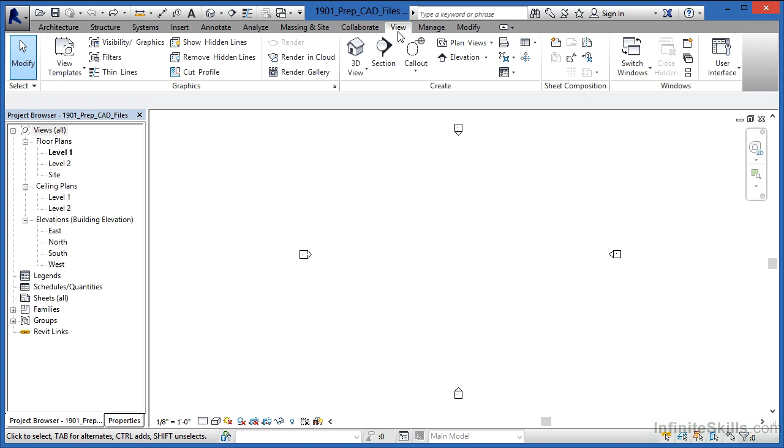Now to accomplish this, you need to begin by creating that drafting view. Because it's a drafting view, we'll find that under the View tab on the ribbon by selecting Drafting View. It'll ask for the name of that drafting view, and that'll be the name it shows up under in the project browser over on the left-hand side. In this case, I'm going to call it a garage detail. It's not the most descriptive name for it, but it is accurate. It is a detail of part of the garage.

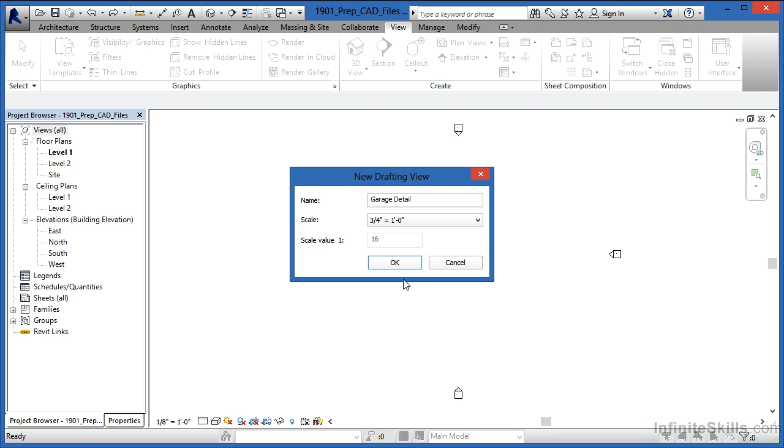Next, we have the scale, and I know that this is 3/4 of an inch equals a foot. And click OK. It's now created a new Drafting Views category under the project browser, and if you expand it out by clicking on the little plus sign, you can see that this is a garage detail. And it's now 3/4 of an inch equals a foot, and it's just a blank drawing area right now.

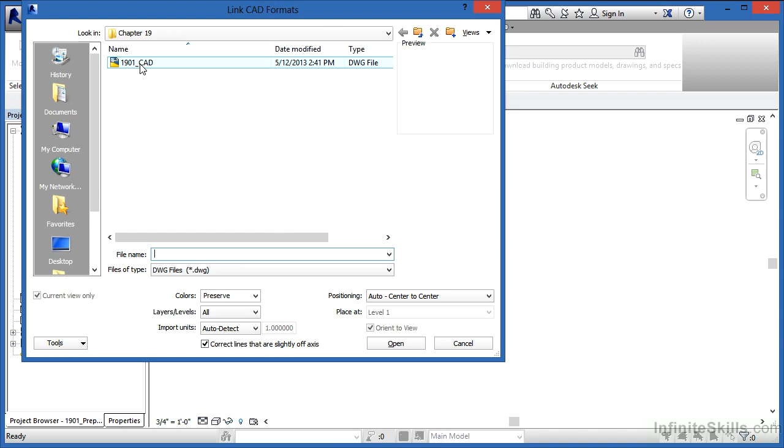To insert that CAD information, we come to the Insert tab, and we have one of two different ways we can bring that CAD information in. We can either link it in, or we can import it in. If you link it in, and I'll do this as an example, you'll then have the ability to select that CAD detail that you want to bring in. In this case, it's named 1901 CAD. From here, click on Open. Give it a few seconds to process.

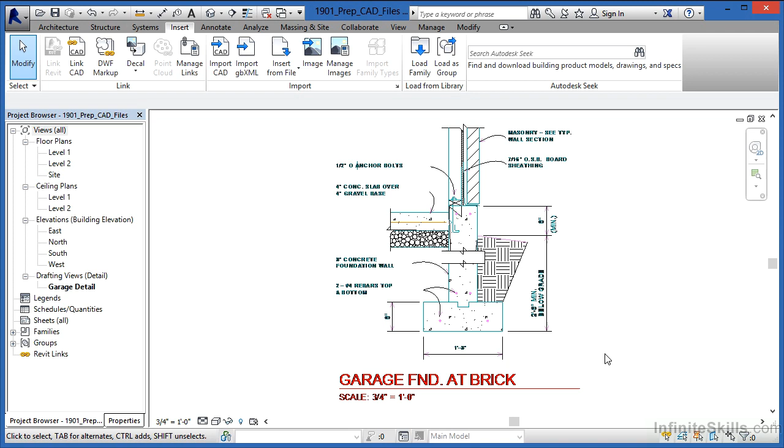The next thing to do will be to either type in the letters Z, E, or double-click really quick with the wheel on your mouse, and that will zoom extents so you can see that entire detail. If this is good enough, at this point you can place it in your drawing and start to print it. More than likely, you want to do some cleanup of this, and the reasoning is that this isn't really your typical Revit font. Most likely, your Revit arrows probably don't look like this. If you zoom in, you'll start to see some oddities like this little arc stops right here instead of coming all the way over.

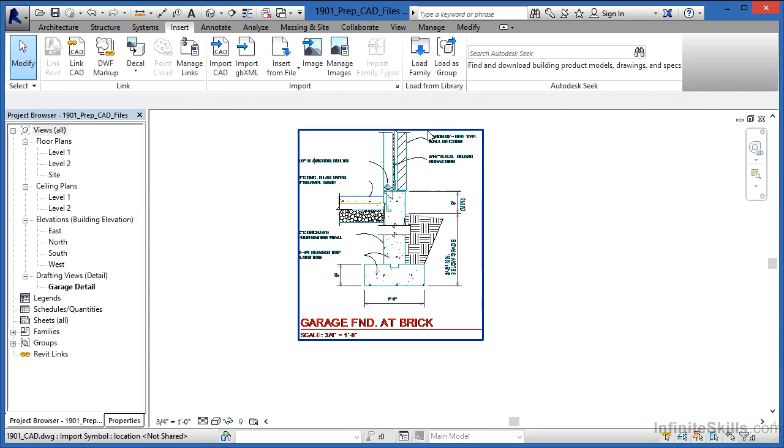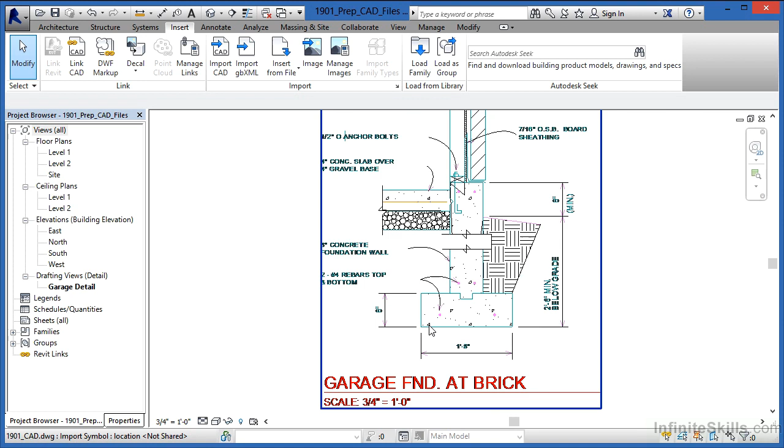So there's going to be a lot of cleanup that needs to happen in here, and really, if it's a linked file, it's difficult to clean it up inside of this environment. What you can do, though, is trace over a linked file, and you can use your drawing tools to draw lines by picking the endpoint of a line to the next endpoint of the line, and just start to sketch right over the top of it. Then whenever you're done, you can highlight it and press the Delete key on your keyboard, or just right-click and go to Delete in order to remove that detail. At that point, because you traced over the top of it and put in your text, you'll have an exact copy of that detail just redrawn inside of Revit.

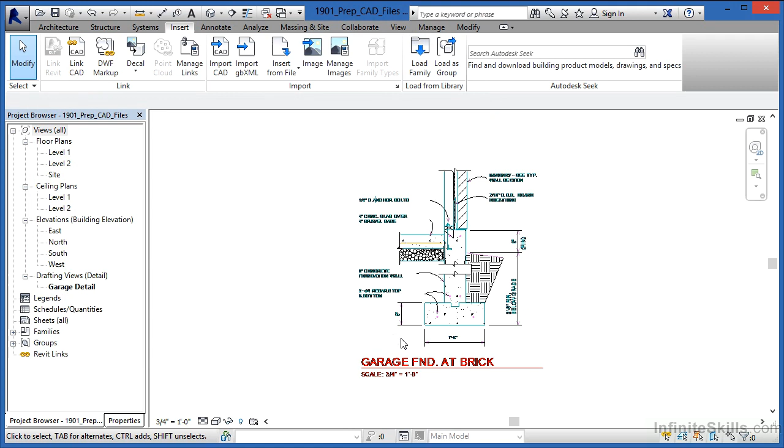The nice thing about doing that with the link is that you know that you get all the lines exactly right. You don't have to do much measuring. It's just click, click, click, and fill in the information without having to be amazingly accurate because the accuracy is already drawn for you inside of the original CAD detail. Now, the other thing that you could do instead of linking it in and then being forced to just trace over the top of it is you can import the CAD information in. If you do this, you can select that CAD file just like we did before, and click on Open. In this case, we didn't have to zoom out because we already were zoomed out.

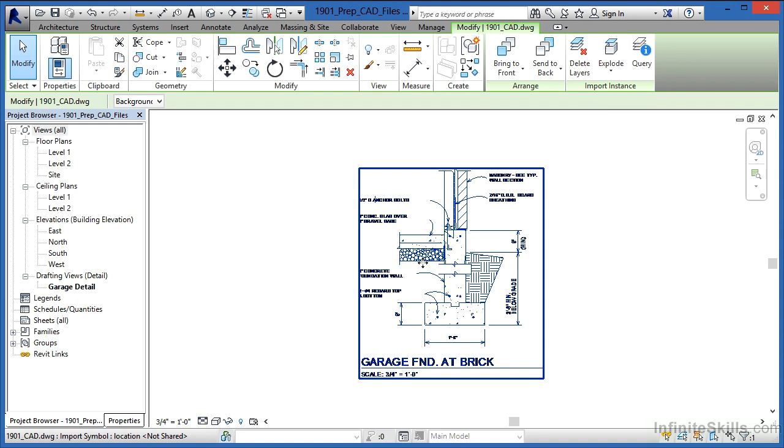If I select it, it looks exactly the same as it did before, but we now have something special, and that's called Explode. If you select where the word Explode is, there are two different options. One is Full Explode, and then there's Partial Explode. The Full Explode will explode everything. And when I say everything, that includes each and every line that makes up these circles in the gravel. It will explode these patterns here, so each of these little tiny lines that make up the concrete symbol would be individual lines. In short, it'd be a big mess inside of this detail.

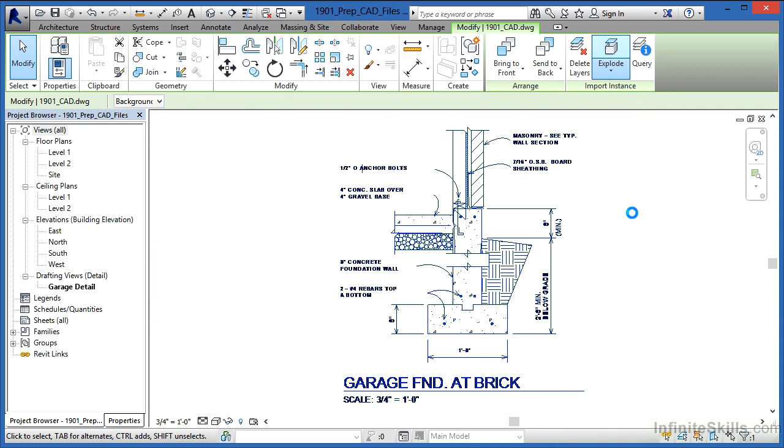On the other hand, the other option is a partial explode. You'll get a warning message, and you can close that warning message down. What the warning message said is that this originally came from a drawing that had three-dimensional information in it, and you can't bring that three-dimensional information into a drafting view. Are you okay with that? And by clicking OK, it just got rid of that three-dimensional information.

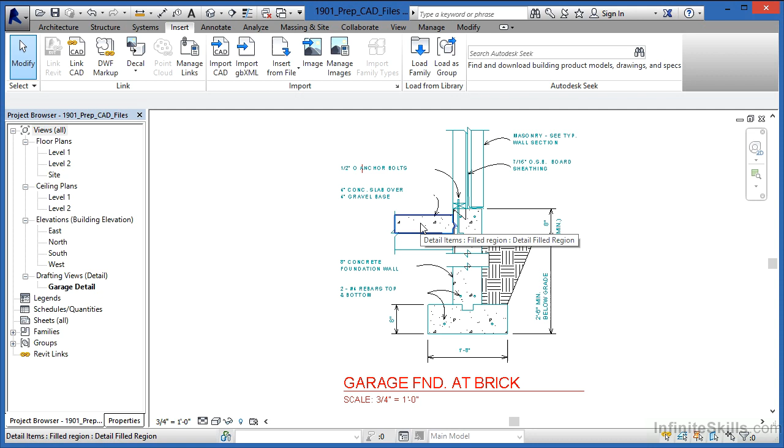Here, we can see that if we highlight over any of these pieces, things like the title can be highlighted, the dimensions can be highlighted, and I'll call it a hatch pattern because that's what it originally was in AutoCAD, but it's now a fill pattern in Revit. It's all one piece. It's not individual pieces of concrete, for instance. There is a problem, though. Let's take a look at this arc.

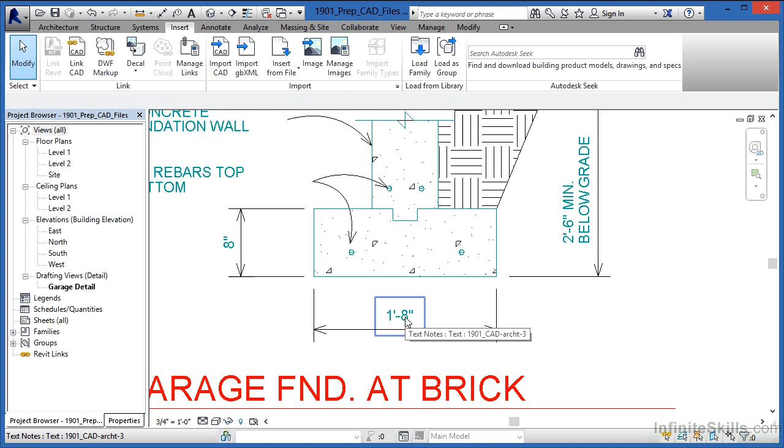Each individual lines and not a true arc. This arrowhead is no longer an arrowhead. It's line work that looks like an arrowhead. Your dimensions are the same way. Your leaders. Everything that might be part of a dimension that was brought in from that AutoCAD environment is now an individual line. Even the text, which would have been multi-line text, may be showing up as being just a

single line text. Now, one thing that you can do is select on any of these pieces of text, come in here to your Properties dialog, and then change it on the Type Selector list to be an appropriate size font, such as 3/32. And you could do this throughout.

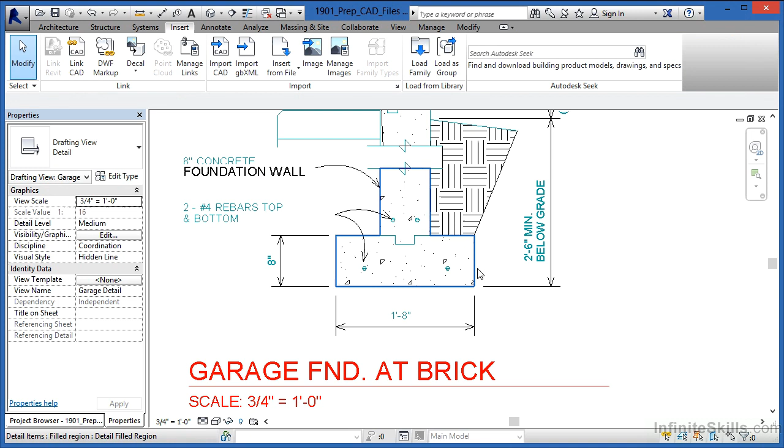The only problem, though, is as you come in and you window around these things, you pick on the different text sizes that you want to have, you start to see how these get to be spaced a little closer than what you'd like. So you'd have to take the time to pull these apart, move these to the right locations so that they start to have the right look and feel to them.

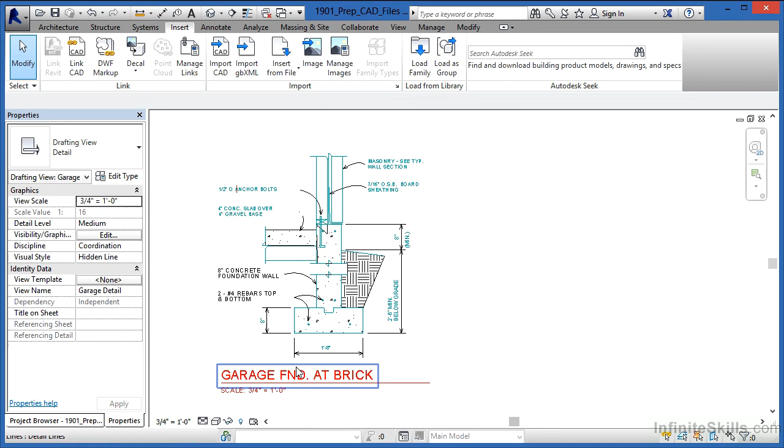As far as I'm concerned, the only thing that's really good about that procedure is the fact that you do get these individual lines as well as the fill patterns, and they're still available to you. It means that you don't necessarily have to recreate such things as the fill patterns. You don't have to redimension each and every one of these because they're already dimensioned appropriately.

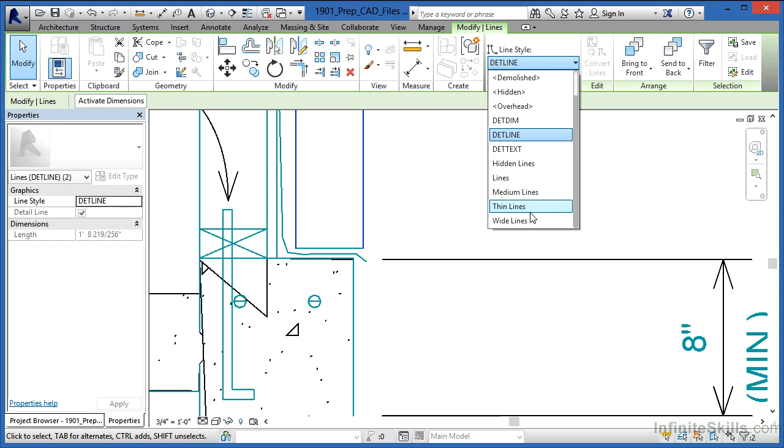All you need to do is select on each of these items and then pick where you have your different detail lines and tell it that you want it to be a certain line or certain line weight. For instance, and I realize this is a little bit odd, I'm going to pick wide lines for this, just so you could see a fairly dramatic difference here on the screen. See how that's a lot thicker now? And you could go through this on all the lines that make up this detail and give them the appropriate line weights without having to redraw it from scratch.

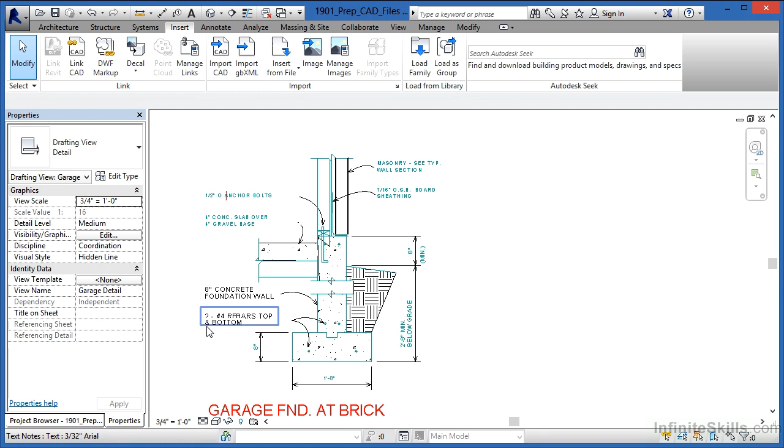But the things you will need to redraw from scratch are going to be the text, the arrows. Otherwise, it's just never going to look right, or you'll be spending half your day trying to move these around, when in reality, you could have come in, just used your text commands from underneath Annotate, and just renoted the entire thing in a matter of minutes.

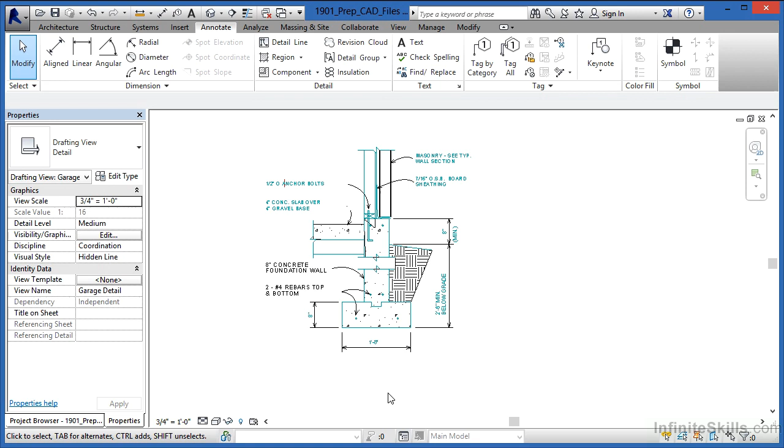One other thing that you should do, if you bring these in, you should always get rid of the title that's associated with them. And then you can just hit the delete key after you've highlighted on those entities. The reasoning is, this is a drafting view. Because it's a view, the second you pull it onto a sheet, it'll automatically have a title generated for itself.

So, to kind of wrap this up and talk a little bit more about what it is that we did, if we want to bring in your CAD information, you probably want to have them in a drafting view. Second, you may want to just link it in if you want to trace over the top of it using your drawing commands found underneath Annotate.

Also, if you instead decide to import it in so you can use the existing line work without having to redraw it, remember you're going to have to highlight over all this stuff and then delete it, get rid of it. Get rid of your dimensions, get rid of your text, and probably renote the entire thing so that it looks right and meets your company standards.

Both of these processes sound like they take a long time. The reality of it is that for most CAD details, you can usually completely redo it in less than 5 minutes. The only issue, though, is that when you bring in your CAD details, your CAD information, just remember you should always get rid of the CAD information because it's not going to meet your standards. And the second reason is that CAD information can also lead to instability issues in your Revit models.

Autodesk once said that about 85% of all the issues that they have inside of the software program, if that Revit file doesn't want to open, if Autodesk gets them, they will strip the AutoCAD information out. 85% of the time, that's what's causing the issue inside of the Revit file.

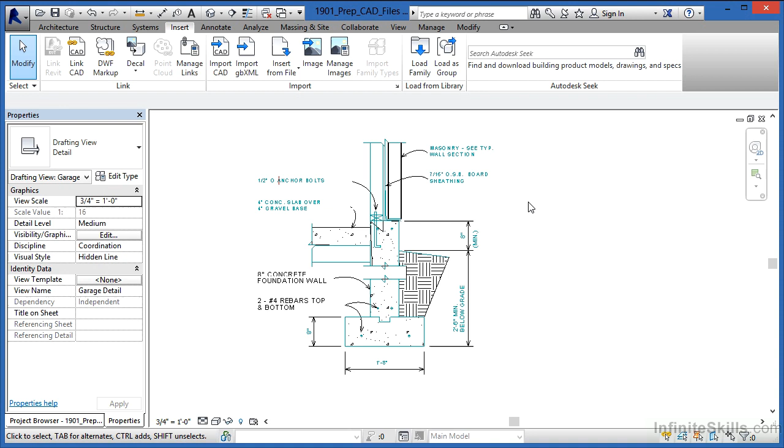So it gives you a little bit of a background as to bringing in this CAD information is fine. Tracing over it is fine. But it makes more sense to get rid of it or select on individual pieces of information and turn it into true Revit entities because it'll look better, meet your standards, and also add to the stability of your Revit design.